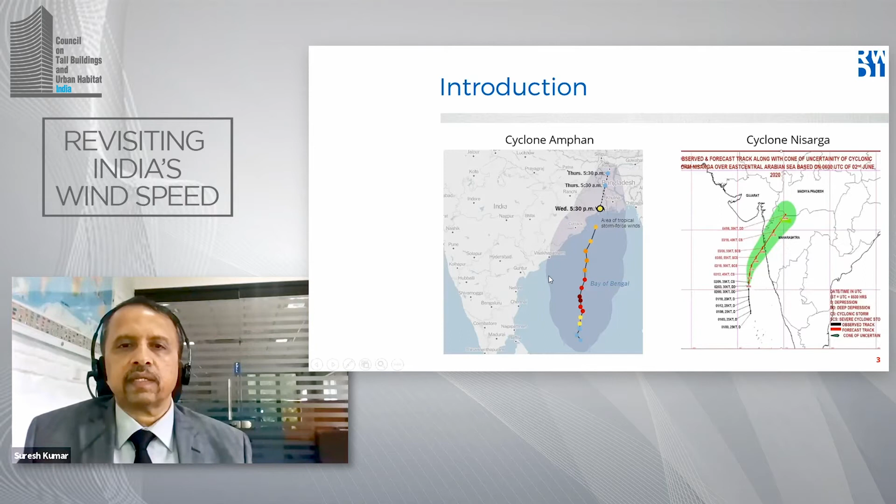Most recently, another code came up with another wind speed map, in the National Building Code of India, where there are subtle changes between the 2015 code and the 2016 version. The Delhi region is getting some changes, as well as many other locations if you go through closely. So there is already confusion about which one is to be followed.

When we were doing projects in Delhi, some people are saying use 47 meter per second, and another set of team is asking for 50 meter per second. So this issue has to be resolved very quickly, because otherwise you will see different wind speeds being used for the same location. Another thing I'm noting here is abrupt changes in speeds.

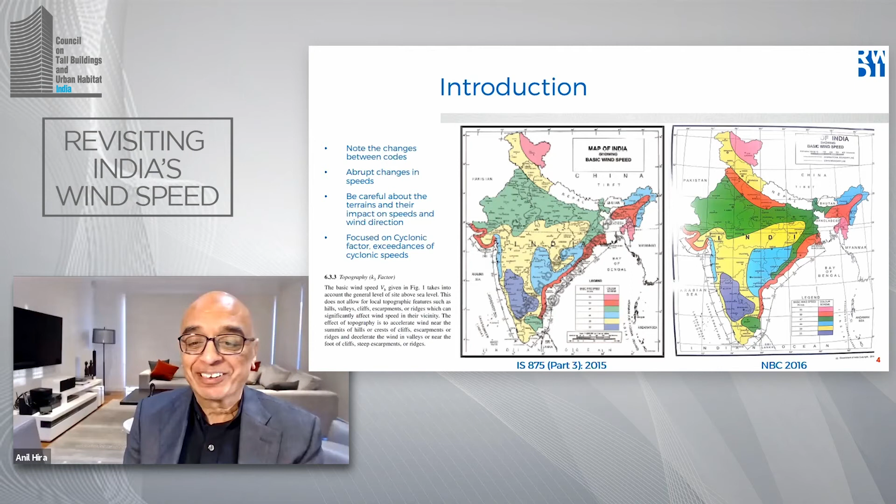That's an interesting question, but I would be tempted to go with IS 875 Part 3 2015, because it is supposed to be the wind code. Whenever you want to do calculations, you require other factors etc., so you cannot go back to any other code to pick the factors. So once you are in this code, you have the speed, you have the factors, you can calculate everything.

But the National Building Code of India, Bureau of Indian Standards should immediately update the map inside the IS 875, if this is the path we are trying to follow, because otherwise that will confuse the public, since we have been using multiple speeds for Delhi right now. All right, thank you.

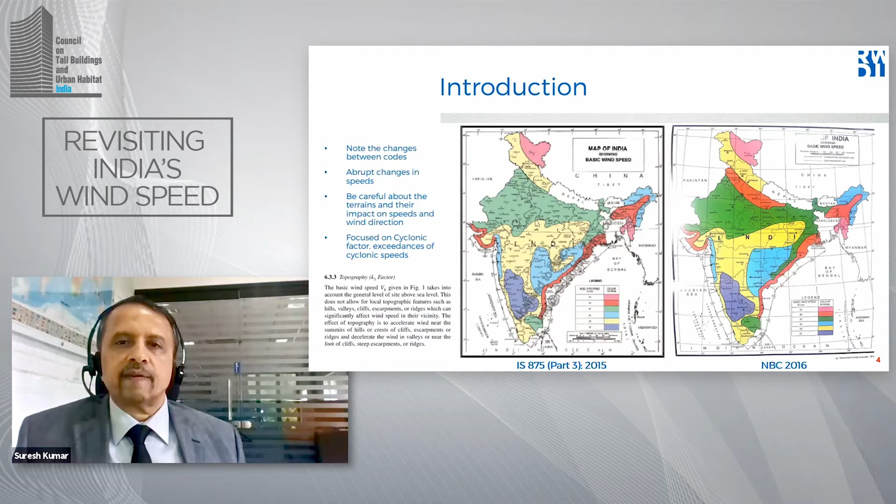Now getting into the importance of wind climate, because you have multiple links in this chain. This is a famous wind loading chain from Professor A.G. Davenport from Canada. In order to find the wind load you need these links. All of these links are important, but wind climate is the super important link, because the coefficient of variation in this link is too high for the wind speed, about 10%.

How this is going to impact our structures: local pressures increase by V square. That means if you err on 10% of wind speed, your cladding loads are going to be 20% higher. But in structural load the complications are more, it's not just V square, it could even be V cube. That means when your speed is increased by 10%, your overall increase in structural load could be anywhere from 20% to 30%, which is very critical as far as design is concerned.

So that is the reason why wind speed is very important. But the interesting thing is the wind tunnels don't have anything to do with the wind climate. The wind climate of the location belongs to airport measurements, balloon measurements, aircraft measurements etc. But these are primarily controlled by another team, not really structural engineers or wind engineers or architects. We don't have any control on those measurements.

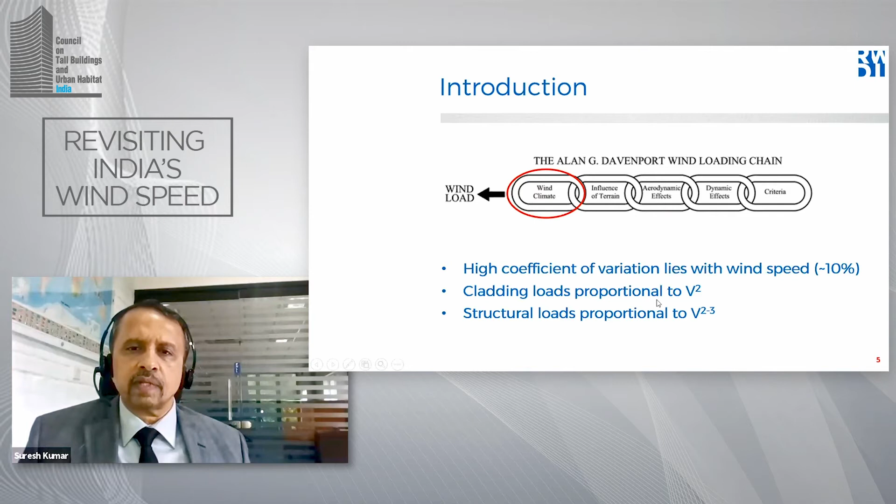Now, Suresh, with respect, yeah, go ahead. You again.

For tall or high-rise buildings, you're right, the loads are proportional to V cube virtually. And that converts to cost, and I think that's the biggest challenge for us. It's the costs, and so your wind climate is very important. I think that's something we have to emphasize to all the stakeholders, not just engineers and wind engineers - the cost implications. Exactly, cost implications are significant.

General belief is that many people like higher numbers in terms of wind speed just to be safe. But regardless of the number you pick, you can never say you are 100% proof. There is always uncertainty. Uncertainty cannot be dealt with just by increasing the speed - that is not going to deal with uncertainty. We have to live with uncertainty, and there are ways to take care of that, and that is the way to go. Yes, very good point.

So with respect to India, we can see primarily we have different systems, wind climatic conditions in India. For instance, synoptic winds of the order of 1,000 kilometers in size, which could be monsoons. As you know, right now it is passing through India, which is one of the systems which can produce relatively high winds at times.

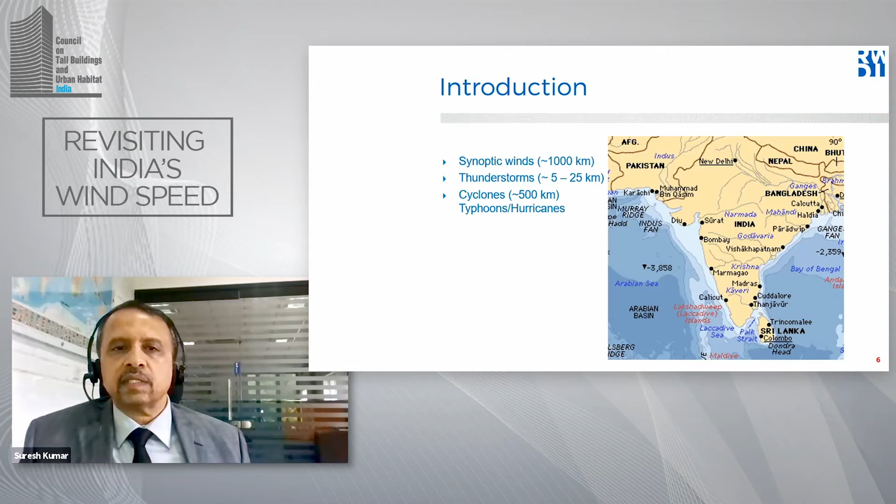So this is a short introduction. Now we have to get into how international people are dealing with these things, because there are a couple of things we have to be very careful about. One is basically the return period. Return period is the chance of occurrence of a storm in a particular year. For instance, if you say 50-year return period, that means the chance of occurrence of that storm in a particular year is 1 by 50 - you have 2% probability of that storm happening in any given year.

So let us see how the Australian and New Zealand standard is doing. The question is, you have normal structures and post-disaster structures. Normal structure means typically all our high-rise buildings. Post-disaster structure means schools and hospital buildings, communication towers, very essential facilities - during cyclones you get people away from the coastal lines and make schools the shelters.

So how they deal with this: importance level 3 for normal structures, with 50-year design life, they go with 1,000-year return period. Here we have to be very careful - a 1,000-year return period means it's an ultimate limit state design, and India is not in ultimate limit state design yet. We are still in 50-year working stress design right now. But to go to the 1,000-year design, we take the 50-year design multiplied by 1.5, which is our factor of safety.

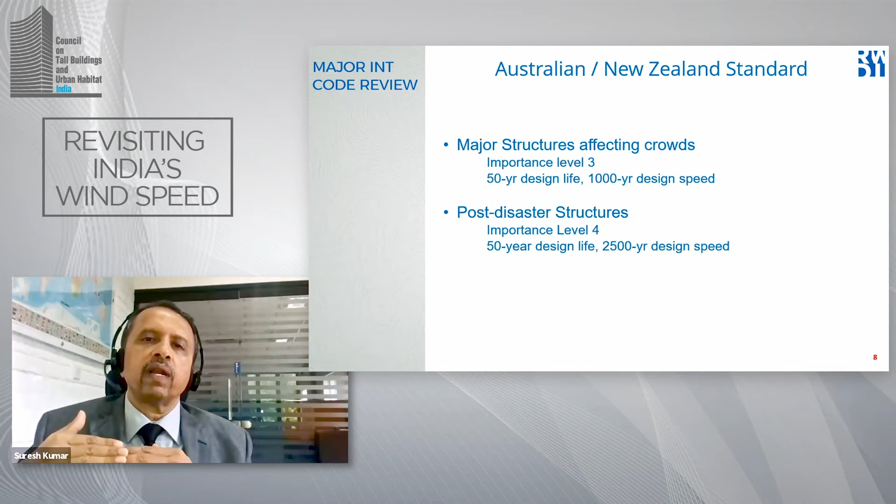And then for post-disaster structures, they have 50-year design life with a 2,500-year design speed. So all they do is basically go from the 1,000-year to the 2,500-year return period speed to address going from normal buildings to post-disaster structures.

Keep this point in mind, it's very important because of what we are doing in our code, you'll be seeing so. This is a major code, a very fantastic code I would say, for wind engineering purposes, wind load calculations, and they are also following 3-second gust similar to our code. ASCE 7-16 is another fantastic code, even though nowadays it is getting bulkier, but it has lots of information in that code, and this is also following a similar pattern like Australia.

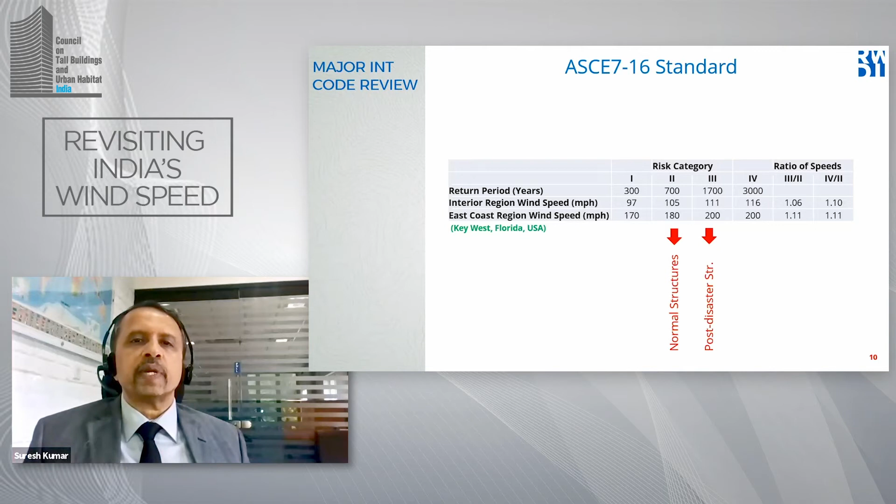Now I move on slowly to the IS code, and then we can relate back to what we have seen just now. So the IS code—I don't have to go through each and everything, everybody by heart knows that particular equation. Vz is equal to Vb into K1, K2, K3, K4. We are primarily interested in K1 and K4. And K1 was there even before, the 1987 code has K1 too.

So look at K1, the probability factor. It is written as risk coefficient—we'll see soon what it is. And now the new introduction of the cyclonic factor, which is K4, which was not there before. This is the point that we wanted to discuss quite a lot in this presentation.

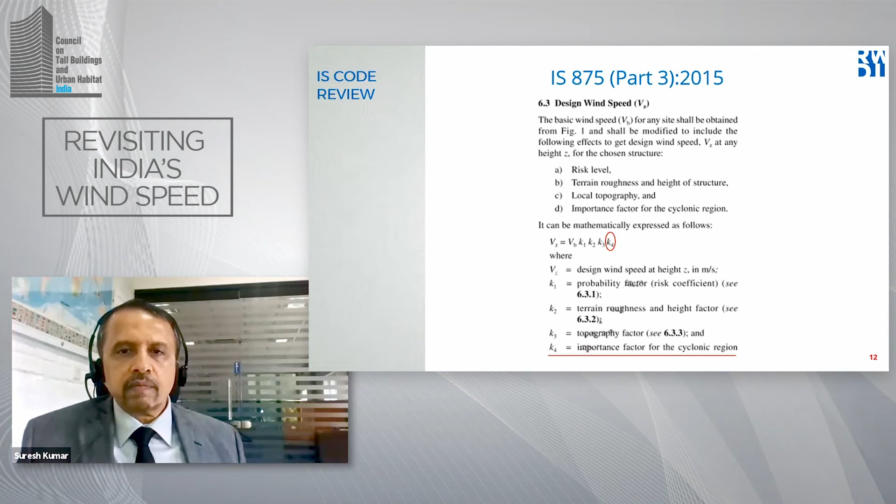Immediately, I'm moving to the K1 factor. So this is the K1 factor from the code. It was nice, I mean, we are designing it for a 50-year return period. And then for important structures, that means post-disaster structures or important structures like hospitals, communication towers, power plant structures, etc., the code is already saying that you can increase the speed between 5 to 8%. Remember what you have seen before—5 to 8% looks very familiar because we have seen it in the Australian code, we have seen it in the American code, the same thing. So we are perfect here, I would say, because we have already addressed this from 1987 onwards, since this code is from 1987, which has been rewritten or modified in 2015.

That is when the K4 came into picture. Now you're going to see what the K4 is bringing. The K4 is saying that, okay, 60-kilometer wide on the eastern coast as well as on the Gujarat coast, where there is a suspicion that more cyclones are hitting that region and doing all of these damages. There is a perception that we have—the damages are caused by wind.

Wind is termed as the villain, doing all the damages, okay? So what is the solution for that? Come up with another factor. That factor is cyclonic factor. What does that factor do?

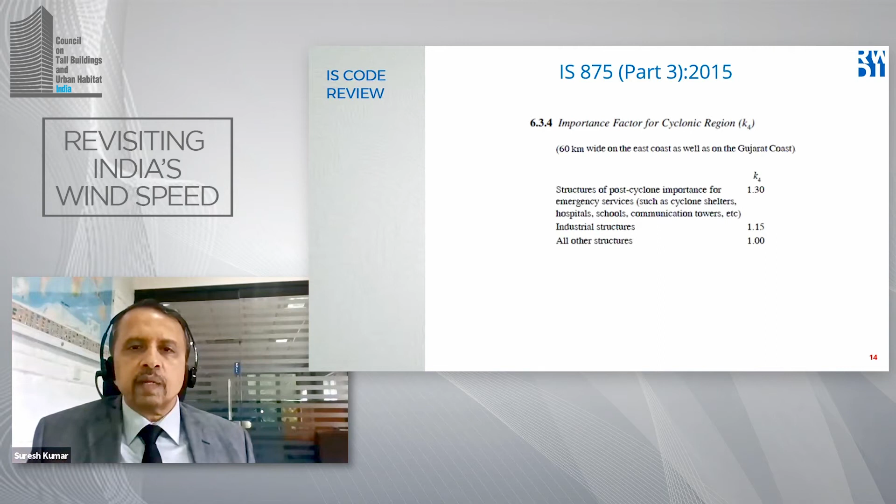What makes logical sense is right here: for hospitals, communication towers and power plants, we say these are important structures, so we design instead of a 50-year return period, go into a 100-year return period, and increase the speed by 5 to 8%, which makes logically perfect sense and also follows international standards.

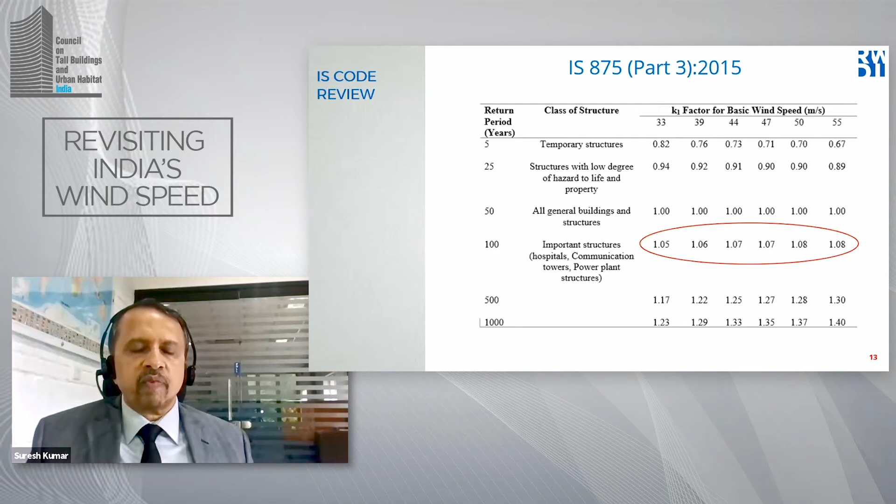Yeah, Suresh, that's very interesting. I just want to make a point about Australia. So effectively, we don't have a K4 factor, right? Yes. And the only difference in Australia for cyclonic regions is that the wind speed in all directions is the highest wind speed, so there's no directionality. That's the only thing for cyclonic. Yeah, correct, there is no directionality. In C and D region in Australia, wind directionality factor is 1.

I understand, but the 30% wind speed increase means the forces increase by 60, 70%. Yeah, it's a big effect. Exactly. Then in addition to the K1 factor, this is going to be approximately 2 times the load. All right.

So now we move on to certain points I want to raise. In addition to the K1 factor, the cyclonic factor is raising wind speeds to exceptionally high levels, leading to very unreasonable loads. And another point is if these speeds really occur, no normal structure will exist, because it's going beyond your factor of safety.

Typically in wind, you never might have seen any structural failure. Total structural failure in wind you see only for low-rise buildings and some shacks and things like that. You never see a high-rise building really crashing down due to wind - you're not going to see that, I never seen that before. But you will see cladding failures and things like that, which is normal. So that is why I'm saying if these speeds occur, no normal structure will exist because it's going beyond the factor of safety.

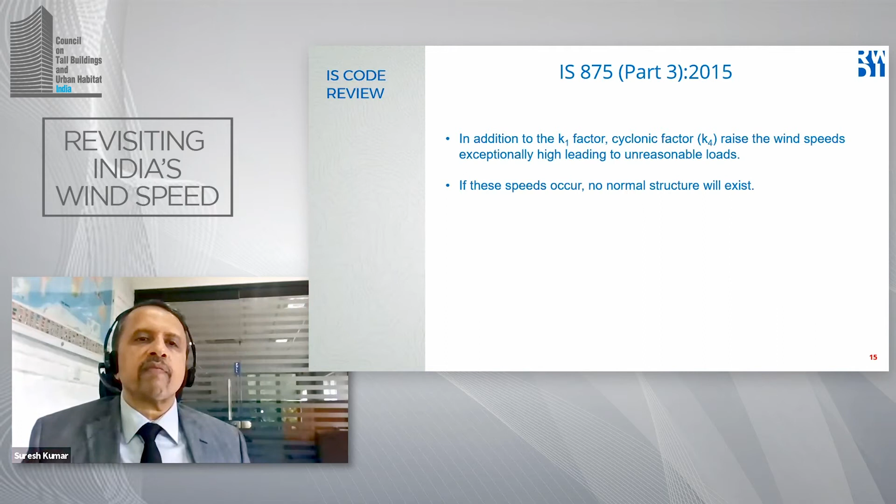Another issue I want to raise is that cyclone-induced historical extreme wind speeds are very rare, because you're relying on meteorological station data. When you look at the IMD data, sometimes we see that for many hours and many months there is no data. Then we ask why the data is not there, and they say that during high winds sometimes they couldn't measure the data - they don't have it. So relying only on land-based surface measurements is not a nice idea to produce cyclonic speeds.

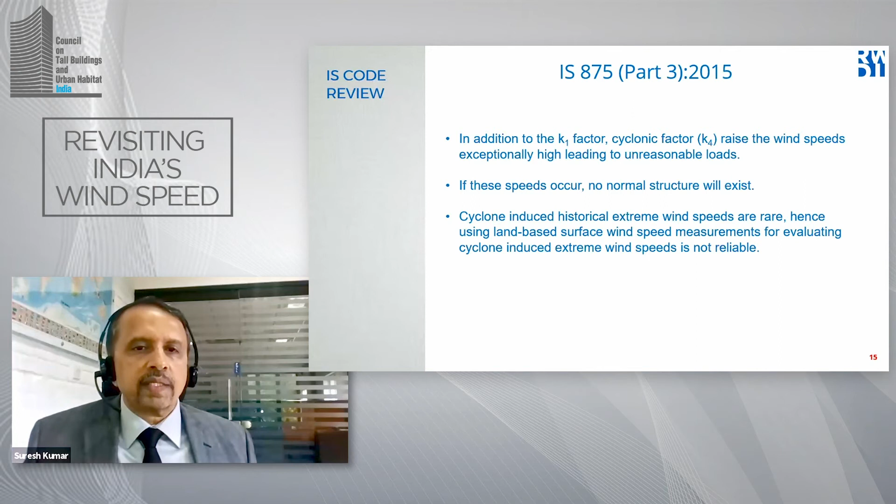So let us see what others are doing. In Australia and America, they are doing Monte Carlo simulation of cyclones, because we have lots and lots of information about cyclones. They understood everything about cyclones - how they form, how many hours they take, which path they follow, what is the translation speed, what is the rotational speed - all the statistics are already built into the system.

Everything, all the history, everything is there, and we can utilize this to come up with Monte Carlo simulation. You can simulate 100,000 simulations or 200,000 simulations, whatever you're looking for, and then you can properly predict the speed at any location.

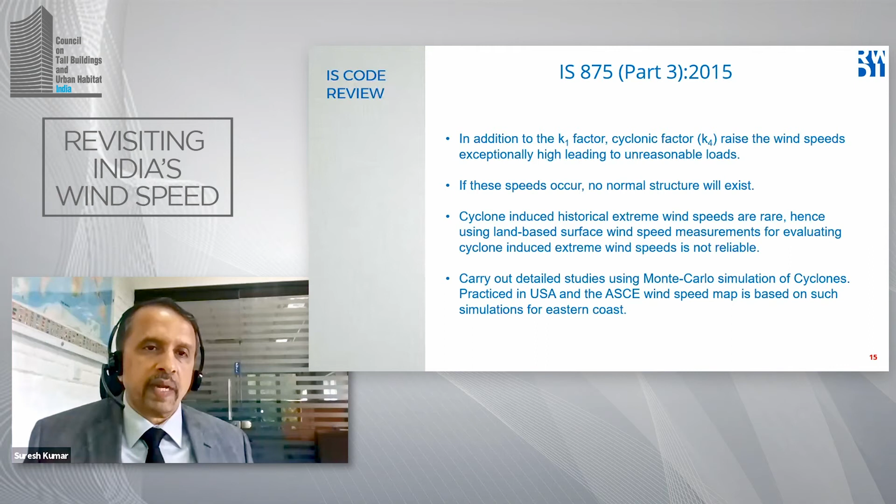Since I brought up the cyclonic simulation, I'm moving on to the cyclonic simulation predictions, what is happening in important locations on the coastal line. I'm not going to be showing all the locations. Let us see Chennai and Calcutta, which are on the eastern coast.

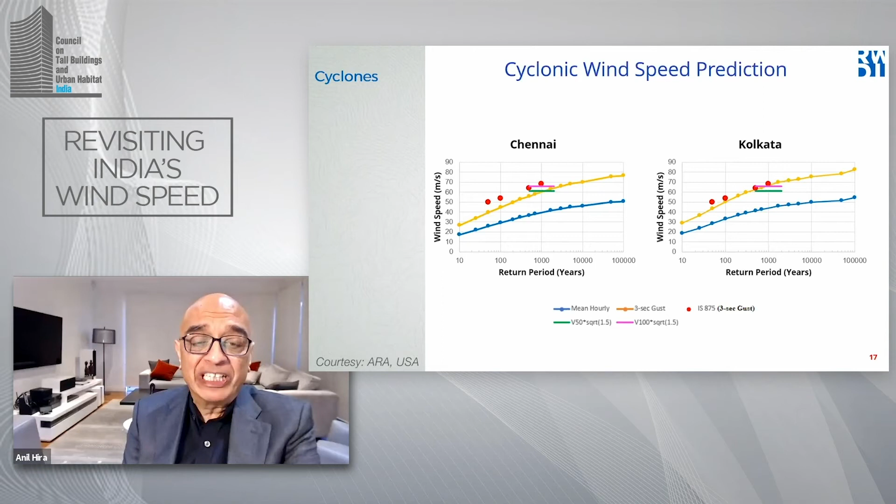So 70 meters per second is 240 kilometers an hour, and if you multiply that by 1.3, you get to 300, that is tornadic speed. Well, the world hasn't experienced it - the highest wind speed ever experienced in the world is, I think, 290 or 300 near Hong Kong.

Yes, these speeds are exceptionally high, and that is the reason for plotting all of these things, just to show you how it is comparable between the cyclonic simulation and what is in the code without the cyclonic factor. This is without the cyclonic factor - that point is very important because I didn't code that right here in this slide.

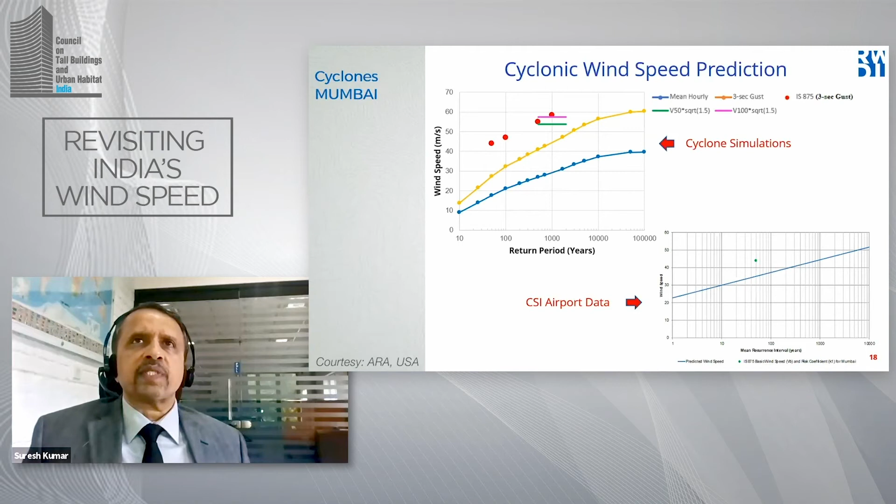Now look at Mumbai. Of course, lots of high rises are coming up there, so everybody is looking at Mumbai and the recent cyclone just brushing through it. I think several other cyclones have brushed through Mumbai before also, because some of the cyclones making landfall in Gujarat have had their outskirts pass through Mumbai as well. So look at the cyclone simulation, the yellow line which is the 3-second gust simulation values, in comparison to the red dots coming out of the code without the cyclonic factor - you can see what is going on in this location.

For the 50-year return period, the cyclonic simulation is giving 28 meters per second, while the code speed is 44 meters per second. So you can see how different they are. Basically, what this is saying is the cyclones are not quite important as far as Mumbai is concerned, because the cyclonic speeds are lower.

But your thunderstorm wind events could be higher than the cyclonic events. If you look just below, I have another plot from the airport data, CSI - Chhatrapati Shivaji International Airport data. We are plotting that with the blue line, and that line is giving me the 50-year return period value.

I didn't put a dot, but look just below the green dot. That is about 35 meters per second, in comparison to the green dot, which is the IS 875, at 44 meters per second. This 35 meters per second includes cyclones, thunderstorms, monsoons, everything included, in comparison to the 28 right here, which does not include thunderstorms or monsoons or any other types of storms. It's purely cyclonic storms. I believe the graph speaks for itself. I don't have to say more than what the graph is saying, because it's very, very clear.

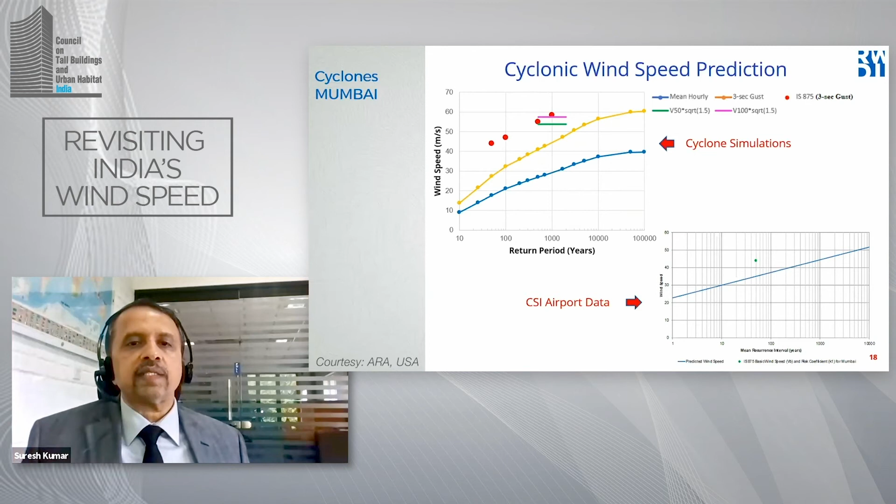Now I slowly move on to the discussion. This is towards the last part of the presentation. It's a very interesting part because I'm bringing up numbers, bringing the whole world into the picture. So before I bring up the whole world, let us look at India, the Bay of Bengal Basin, and the Arabian Sea Basin, what is going on.

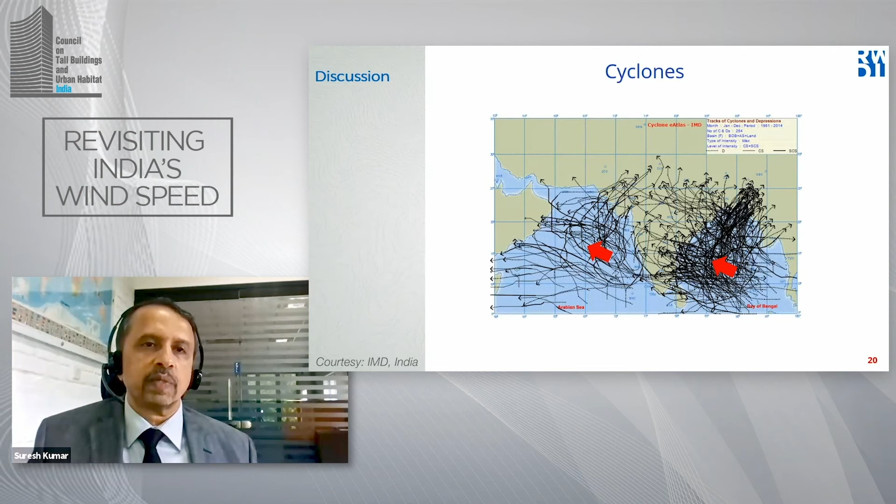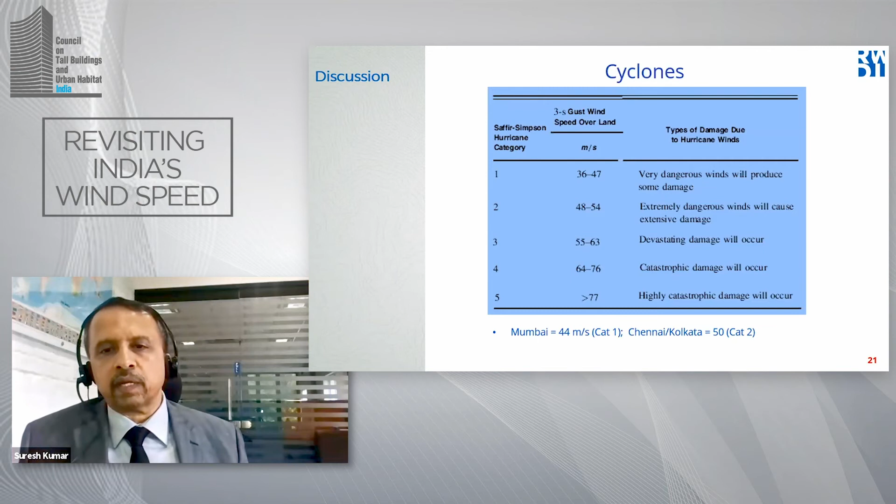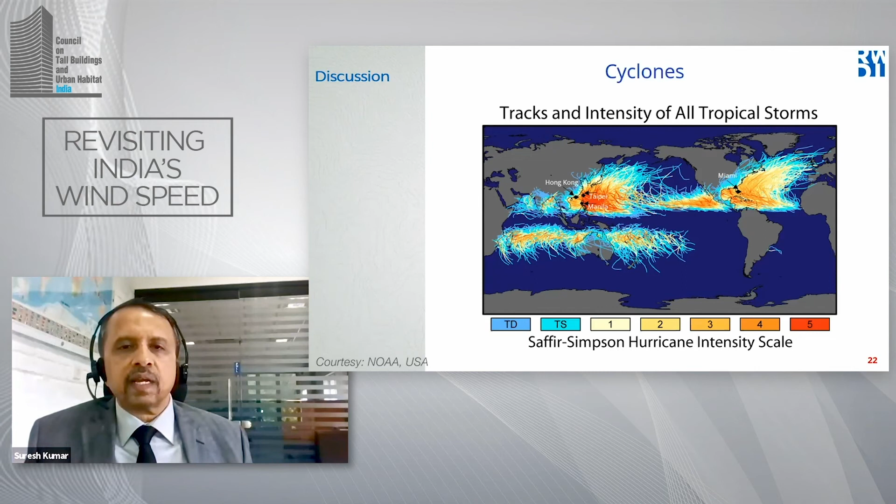And then look at India. India is pretty soft, I would call it, because it has much more pleasing colors here with blue lines, which is not too catchy in comparison to the red. That means you are getting not very significant storms, not too frequent as well, in comparison to what is going on in these other locations. So I want all of you to remember this plot also for the next two slides, and then you'll immediately get where we stand in terms of the speed.

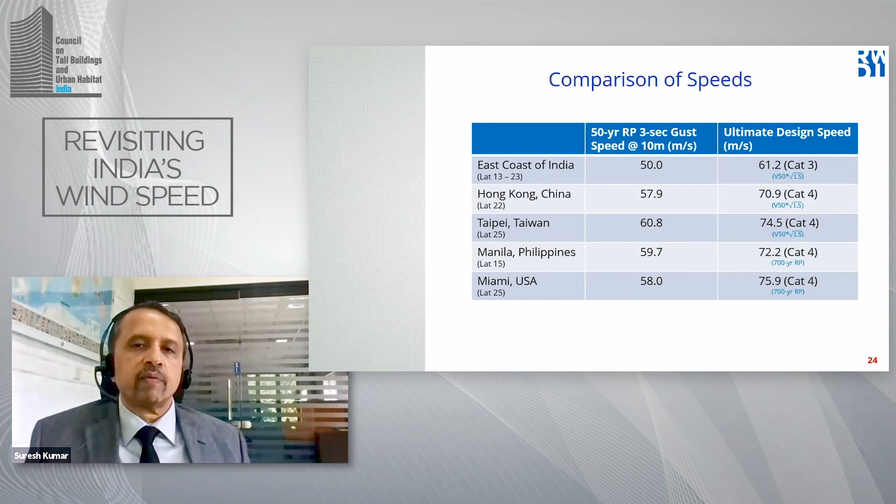So from a layman's point of view, all of this makes sense to me, at least, because I am watching the climate happening around the world very closely, regardless of the country. So when I read all of these things together, at least at this point, I don't have any concerns, because the K1 factor will do the job without the influence or inclusion of the K4 factor. With this, I'm concluding.

Basically, I have some concluding remarks, and maybe after that we'll take it up for discussion. So the question is: is wind the villain responsible for all wind-induced damages?

These are perceptions basically in the media - whenever a cyclone passes by or some storm happens, immediately I see pictures of failures: trees gone, power lines and low-rise buildings destroyed, sheets gone, etc. Then they'll say high winds happened in that city, and this is the speed, some numbers are also there. But then I wonder, I keep reading those articles and think, can I find out where these measurements have been taken? As a wind engineer, I would like to know - did you make this measurement through satellite?

Did you measure it at 10-meter height, 100-meter height, or 2,000-meter height? Without that information, this speed is basically nothing to me, because it has no use for anybody without knowing certain aspects of measurements. And also, is it a gust?

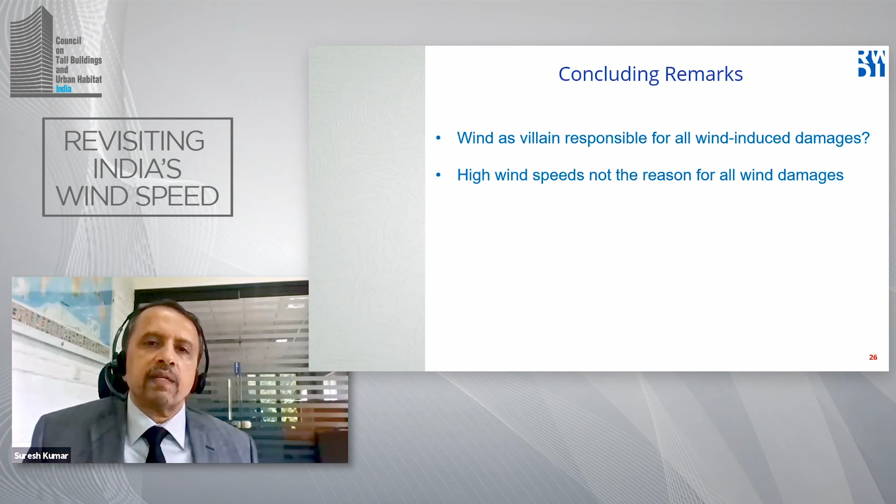High wind speed probably is not the reason for all wind-induced damages. This is the part that is getting interesting. Many times poor design, workmanship, and maintenance is causing the issue. Workmanship is a very serious issue. Even in the building I am living in right now, some fantastic equipment has been installed, but it's been installed by people who don't know how to install stuff. So the whole purpose of that equipment is lost. Workmanship is extremely important, and then maintenance.

Many buildings in India, the maintenance aspect is not taken care of. Once it is built, afterwards when maintenance is needed, if you have sufficient funding, then you will do the maintenance. Otherwise, it is left alone. Those are serious issues.

You mentioned poor design, and I'd almost like to suggest that all the damage is not because of poor design, it's probably due to no design. Most of the damage, and not just in India, around the world, has got to do with non-designed buildings that have not been designed by engineers. We're talking about houses, residential buildings. Would you comment there?

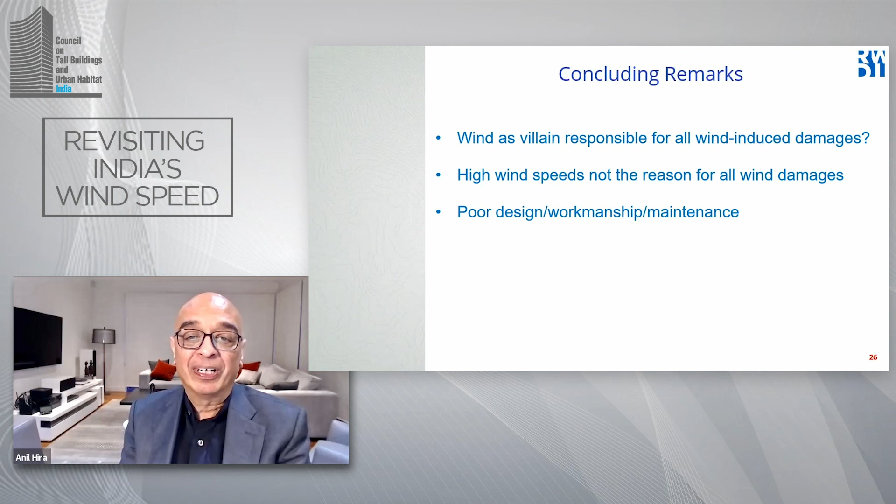Exactly. A number of low-rise building roofs have been blown off because it is not properly done. Sometimes you have some kind of material on the roof, then you just put a sheet above that. So what do you expect during cyclones? It's going to fly, and then hit against another glass, and if that glass is broken, or it hits against a communication line, then your power is gone. So any loose elements are called debris impact. Debris impact is a very serious issue during cyclones and high winds, because all the loose material is going to fly off and hit people and other structures.

The next point is enforcement of code and interpretation of code. I just mentioned interpretation before. Enforcement of code is also very important, because I don't know whether sometimes there are loopholes with respect to the enforcement of code. Even in IS 875, when to do wind tunnel tests, it is written, but it is written in a very small font.

In fact, on one occasion, I kept saying there is a limitation in the code, and this is in the code. Then the person asked me where it is in the code. He could not find it. Virtually I had to go and tell him the page number. I had to locate it for him, because it is written in a very small font and he couldn't find it.

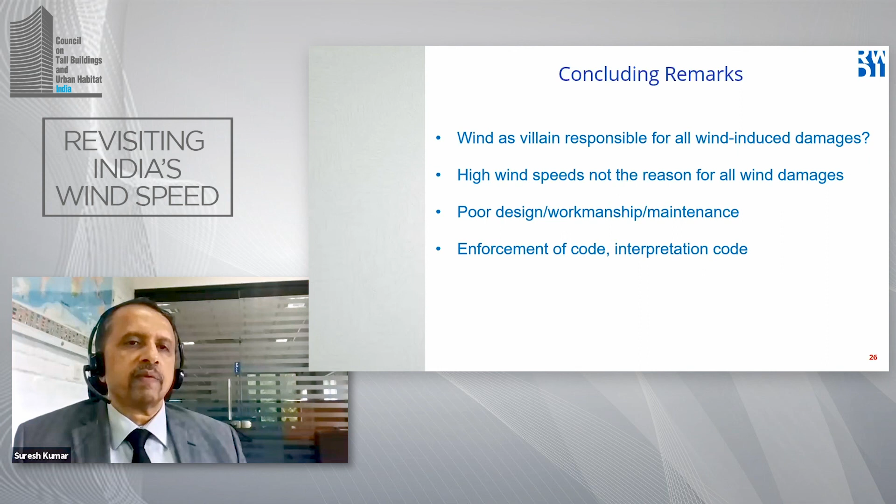This is my last slide, a few more conclusions. Based on our studies, it is not supporting a speed increase for the Indian coastal regions beyond the current wind speed in the code, which means the K1 factor is sufficient and we probably don't need a cyclonic factor in the code. I did not talk about the formulation of the cyclonic factor, which could be discussed, but that is also unsound in my opinion. This is an opinion that I'm saying it should probably be removed from the code, and we are sufficient, we are solid with respect to the K1 factor.

What I suggest is to carry out detailed simulation studies and change the map if that's what we wanted to do. Because currently, even though there's no indication of increased speed, we can still do lots of simulation since land-based simulations are available. We can take upper atmospheric data from NASA, from satellites, and utilize it to predict what is happening on the ground. We can come up with a better map for India, but for that you have to do some work. We have done such work in the past, and the recent introduction of the GCC map in the Gulf nations is a product of our simulations for that particular region.

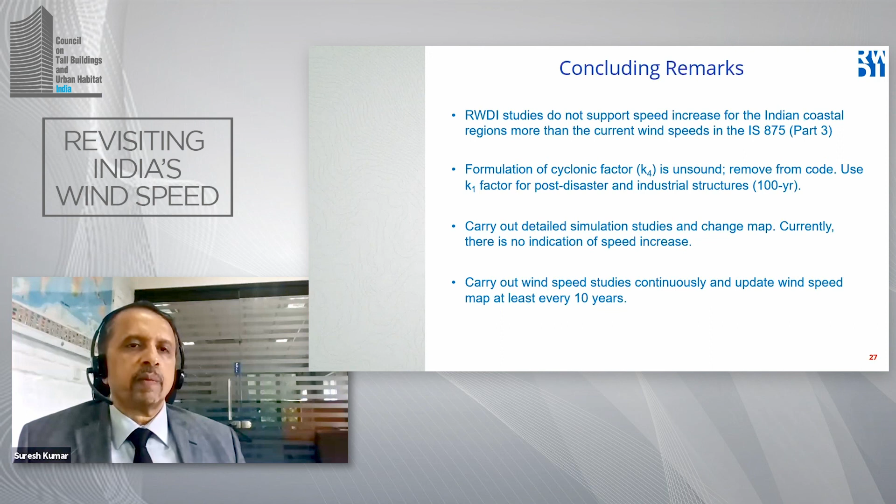Finally, carry out wind speed studies continuously, updating the wind speed map at least every 10 years, because that's what all countries are doing. For instance, ASCE does this every 5 years. You can see the Alabama region increased the speed from 105 to 115 miles per hour in a span of 10 years or so. So this exercise we have to follow. It's not that we find something out, come up with a code, and just leave it. We have to continuously explore what is going on around us.

With that, I conclude, and I think I'll leave the rest for discussion.

Suresh, that was fantastic. It really is fantastic, and I hope it stimulates an interesting Q&A session. But the main takeaway from all this that I get is that it's not necessarily just lowering the wind speed, it's really getting the right wind speed, getting the correct wind climate.

What I see is that we really need to focus on the causes of the damages that occur when we do get cyclones, and not blame it on the wind. We have to find out the cause of the damage.

Correct. Because if we keep increasing the wind speed, we are counteracting another important factor in building design, that's sustainability. We are unnecessarily wasting a lot of materials with a false sense of safety. And we get influenced by damage and fatalities, and obviously there are political influences. Increasing the wind speed is not the right answer.